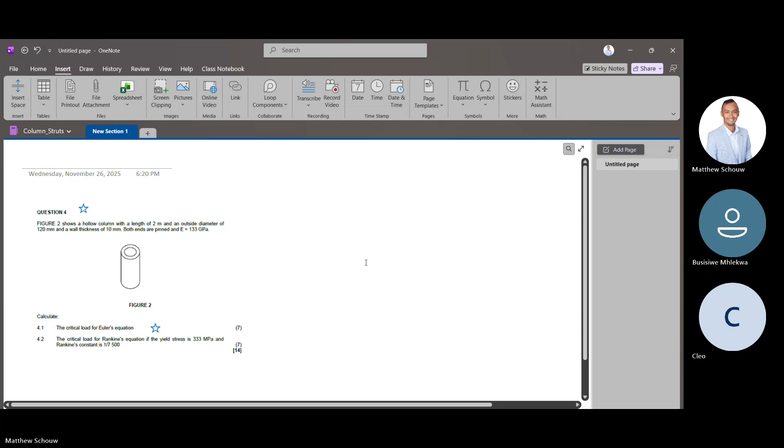Yes, sir. Perfect. Okay, so before I begin, I'm just gonna quickly go through something. I'm assuming you went over it and at least have an understanding of what buckling is about, but I'll just place this image here now. Here we go.

So here we have just some real cases where buckling has presented itself. Just talking to the image, what buckling is, or in this chapter called column and struts - it is inherent for anything which is a column, which is a strut, which is under compression. It can fail in two ways: one way it's going to be compressed fully, or it buckles.

In fact, buckling is a form of instability. So each column, if you ever design one, it is one of the considerations you absolutely must take into consideration. So even though this pillar or column hasn't broken, it is buckled. And this buckling occurs at a load less than the yield - was it before the yield? Here in this case, we have reinforced concrete, and we have the rebars buckling.

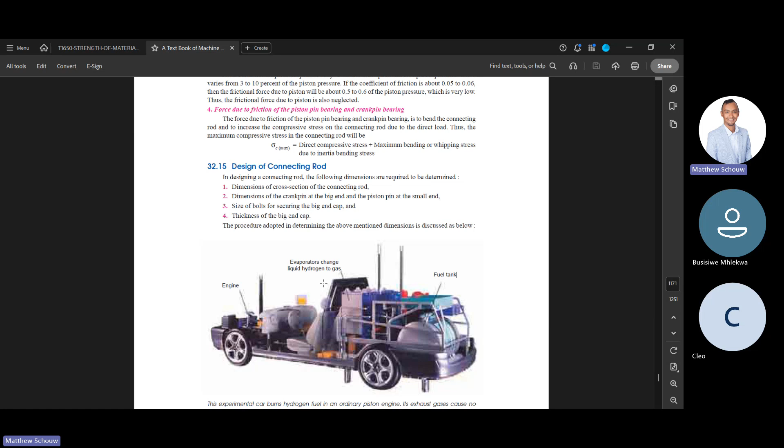So yeah, it's a very common thing that happens. Then I want to show you another thing where on a mechanical aspect this is a big deal - just going to share it with you now. So I'm designing a connecting rod, right? And if you think about a connecting rod, it is positioned in between two places - maybe one is fixed, one is moving, one is pinned. And even when you design the connecting rod, you have to take into account buckling.

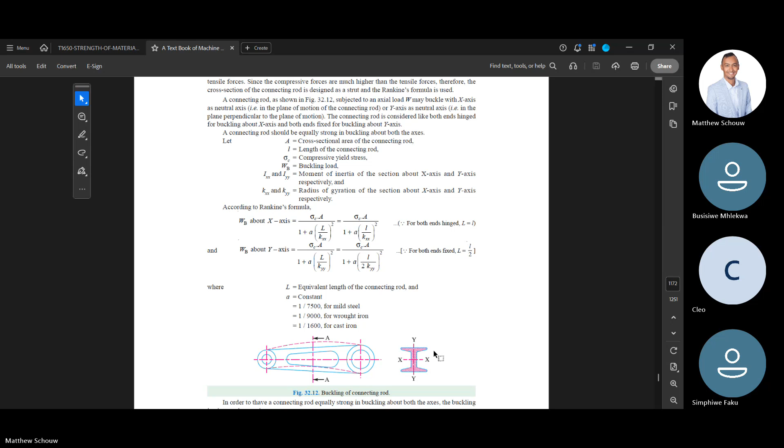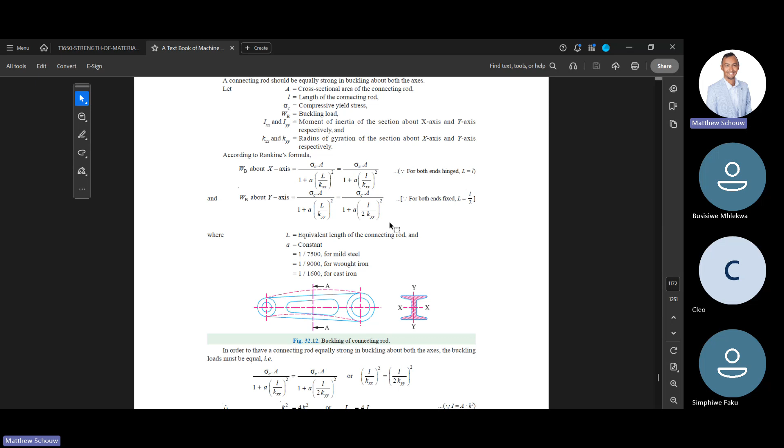And in fact, what you can see here is from a machine design book, and they're looking at the Rankine approach - I believe the slenderness ratios for connecting rods is within that limit. But anyway, even with a connecting rod you have to consider buckling as well, and when they design connecting rods it's one of the things you have to look at. Even the connecting rod itself looks similar to an I-profile - they do some mathematical manipulation, and there's some ratio between the I-section and that rod. But nevertheless, I just thought I'd mention that before we begin.

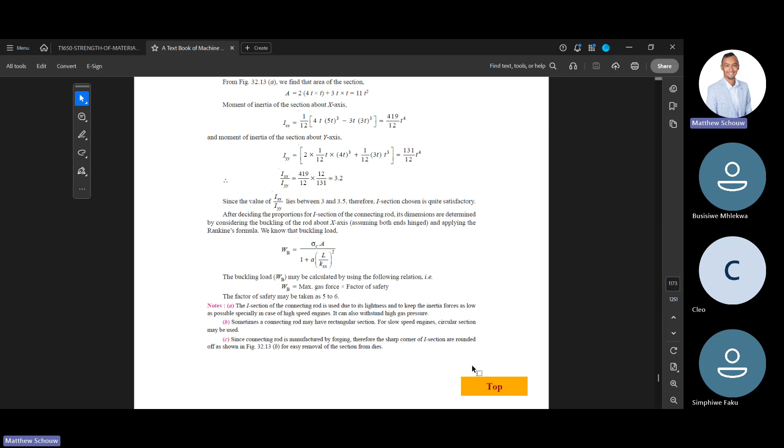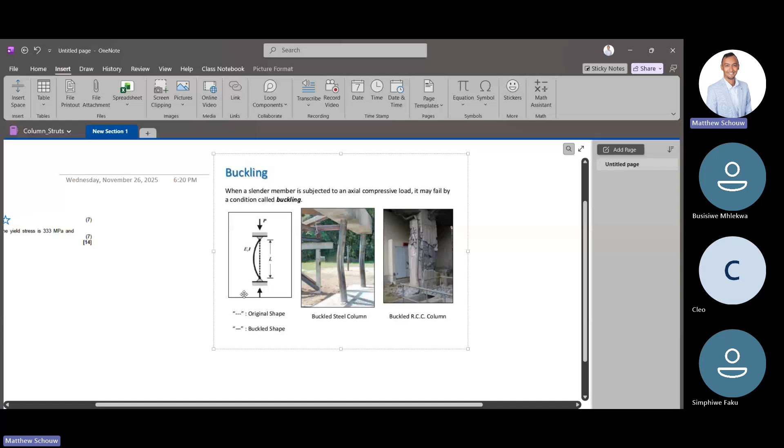Okay, so let's begin. I have two questions which I'm going to solve. This is the first one, and I'll put up the next one as we solve. Okay, here we go - so what do we have here?

We've got a shaft or column with a length of 2 meters, an outside diameter of 120 millimeters, and a wall thickness of 10 millimeters. Both ends are pinned - I'm assuming we all know that's a very important keyword. E is 133 gigapascals. What I want us to determine is the critical load for Euler and the critical load

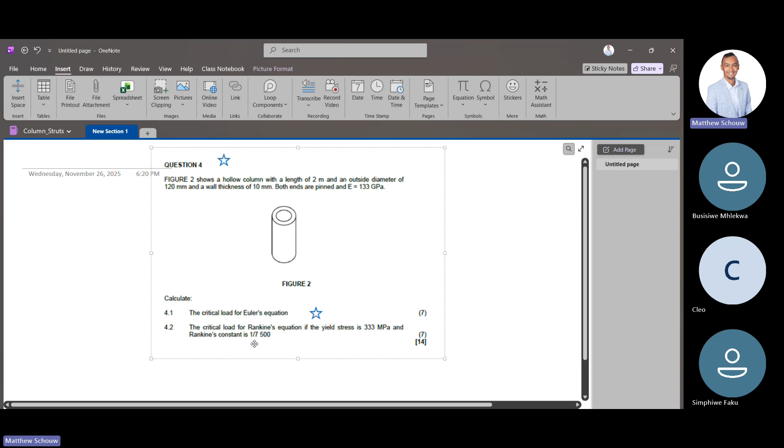for the Rankine. Okay, so these are two different approaches, basically. Normally, they will specify at this level, but yeah, I believe you all know.

Really simple. So in the formula, the unknowns currently, just in my pen here, is going to be I, because E is a material property, and then also LE, which is the equivalent length. Does anyone have an idea how we can get I and how we can get LE?

So does anyone have an idea? So I think the LE remains 2 meters because it's pinned ends.

Okay, cool. Is everyone familiar with what Cleo has mentioned now? That the equivalent length still remains 2. Simphiwe, Busisiwe, you guys agree with that statement?

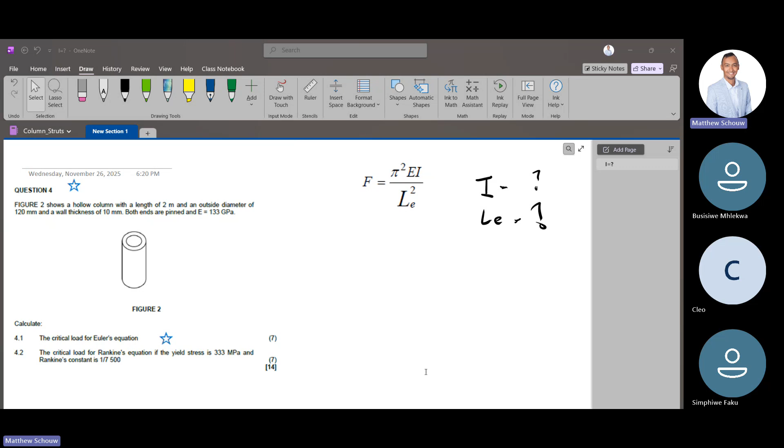So I'm just going to reshare, share the ebook now so you can exactly see. So what is important to note is that a column can obviously be fixed or configured in different ways, right?

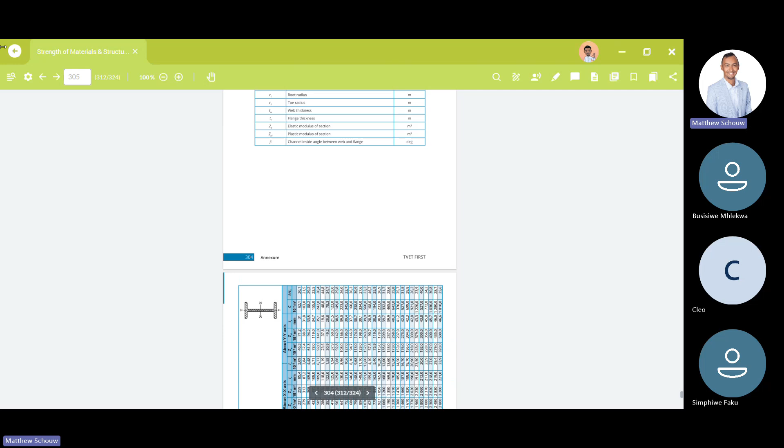So if I go to, what am I at now? Okay, cool, so if I go to the chapter, because this is in chapter 6, my bad. Over here, okay cool, let me just scroll down.

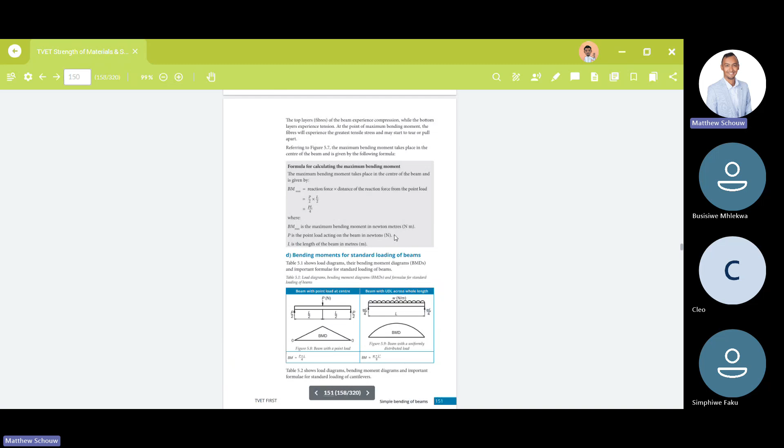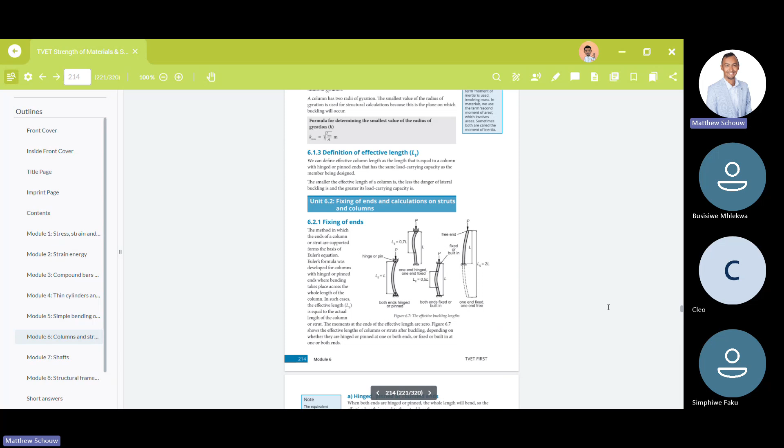So an equivalent length, right? Again, some very important concepts which they mention is - sorry, the effective length I should have used - is entirely dependent on how it's configured. In fact, what I want to say is here are the different effective lengths of the thing.

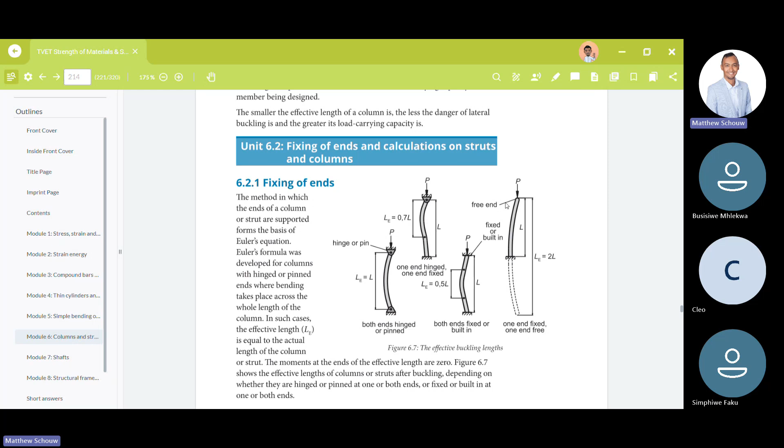So you can have both ends hinged or pinned - so they're pinned over there, right? One where one is hinged and one is fixed. In the case where they're both fixed, or the case where one end is fixed and the other one is free, right? So depending on the statement they provide you in the question, you need to now obviously get the equivalent length.

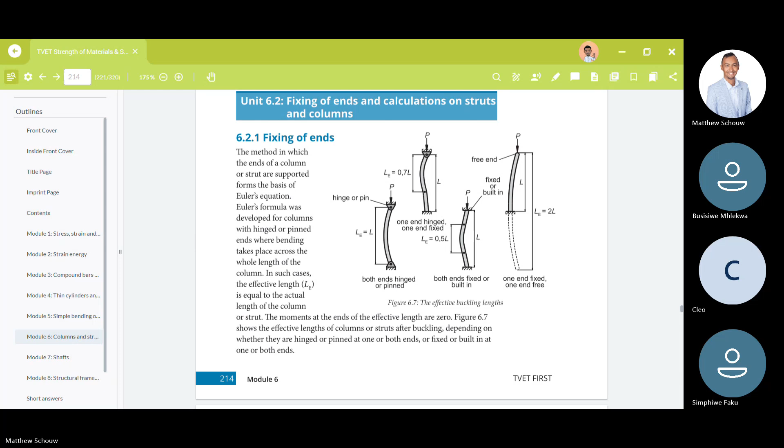Yes, sir. Okay, cool, so that's a very important concept, I guess, that you must be aware of. If you want the previous video of this one, then anyway, you can just let me know.

So therefore, our LE will be equal to L - that stays the same, which in this case is going to be 2. I believe you can see my OneNote. Now we need to calculate something called the second moment of area, which is I.

Does anyone have an idea of how to calculate I for a section like this? Anyone? It's in module 5, basically. I'll tell you what it is.

Anyone - in that one, doesn't... I get confused when it's I equals to B cubed D over 12, and when it's B - so I get confused.

Busi, I is dependent on the shape of what you're dealing with. Is that clear to you? You got that? Okay, so what I mean by that - I was finding a table for you now - is that depending on the shape you have, your I will obviously change.

So, what I is, it's called the second moment of area, and what it aims to quantify is the resistance to bending. So the bigger the I value, equals resistance to bending.

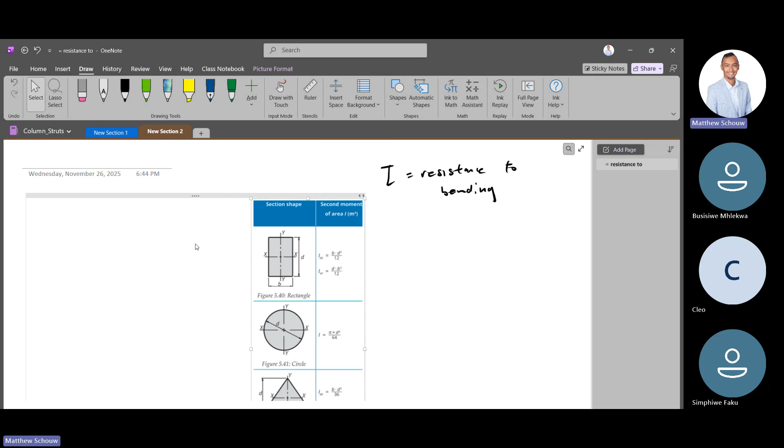But when there is thickness, I also get confused. Okay, so if we can agree that pi over 64 will be D4, however, remember there's a hole in the middle here, there's an outside and inside diameter. So therefore we have to modify it to pi over 64, big D4 minus small d4.

Now I always get concerned when students are confused, let me just use the shapes here. Is there a round one here? Okay let me see, this is round. Perfect, cool. Now use another shape over here. I'm assuming it's roughly the center over here. Let me just configure it here.

So it's quite easy to find if they give you the thickness of a pipe. In fact, even when you buy piping, I'm not sure if you guys do that, they'll say a certain inch pipe, whatever.

Thickness, let me write it like this. The thickness is equal to big D minus small d, divided by 2. Is that correct? Yes. Are you familiar with this?

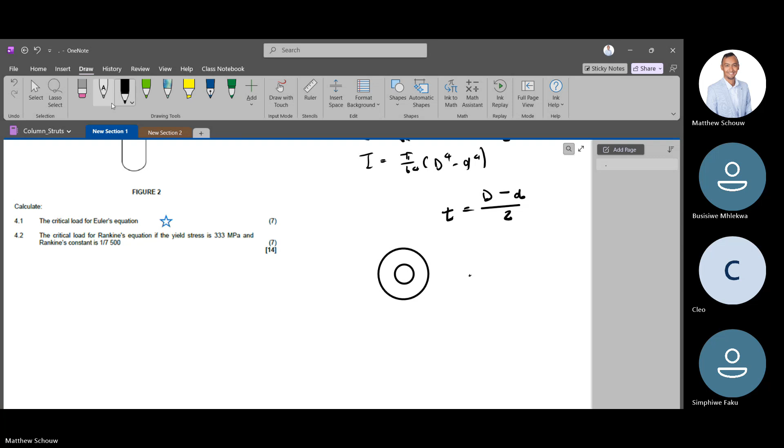So what I mean is you can think about it like this: there's big D, you guys with me? You must subtract the middle one, which is green. You understand? But then we divide it by 2 because both sides should be equal on either end. Are you familiar with this over here?

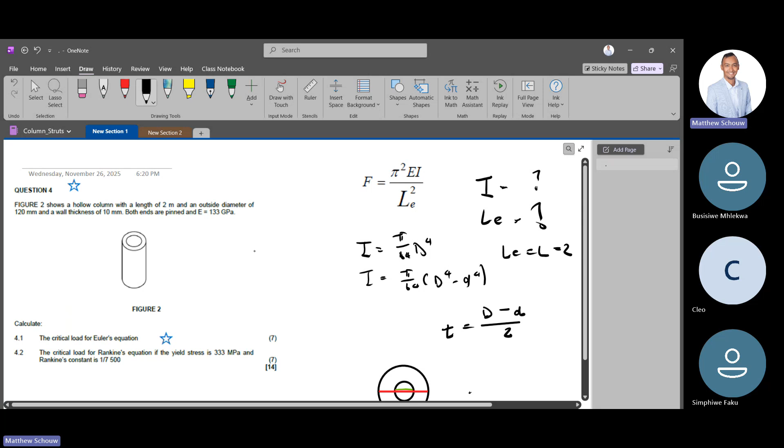Yes, sir. Yeah, so what I'm saying is that if they give you the thickness of the pipe, and they gave us the outside, you can easily find the inner. So it'll be 2T, 2 times T minus big D, minus d. And we can find, or we can say D equals big D minus 2T. You got that? So don't get confused.

So then we have big D already, and then we can find small d using that formula. Are you with me? Yes. Simphiwe, Busisiwe, you guys with me? Yes.

Okay, so all we must do now is find small d. Our big D was given as 120, is that fine? And our wall thickness was given as 10. So we just say 120 minus 2 times 10, therefore D will equal 120 minus 20, which should be 100 millimeters. You guys agree with me? It's really easy.

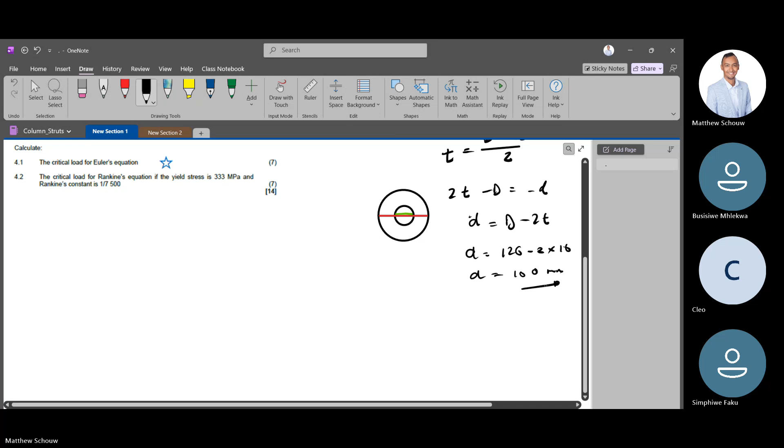Is there any questions up until this point? No, still fine, sir. Okay, but you've understood what I mean. So if they give you a round section, like a column, and they give you thickness, then obviously you want to find the diameter. It's kind of hinting—sometimes they might give you the smaller diameter and you need to find the bigger diameter. But what is important to note is that when you find the second moment of area, you need to use this formula: pi over 64, D4 minus d4.

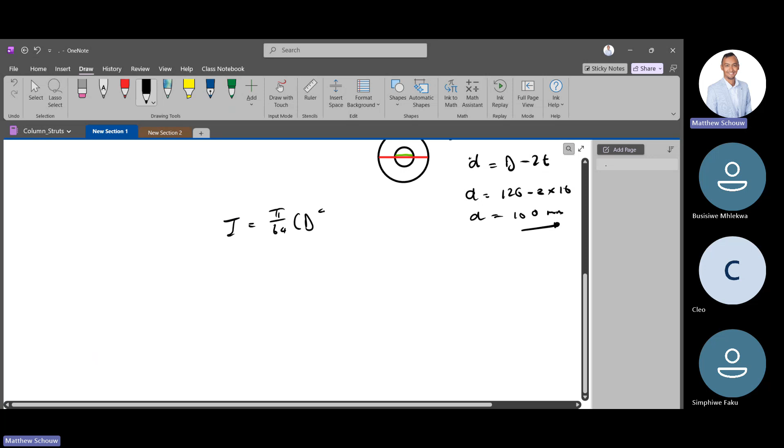Okay, so what I want you guys to do for me quickly is calculate I for me. I is pi over 64, big D to the power 4 minus small d to the power 4. That's pi over 64 times 0.12 to the power 4 minus 0.1 to the power 4. Can we get this value?

5.27 times 10 to the negative 6. Does everyone agree with that? Can we trust Cleo?

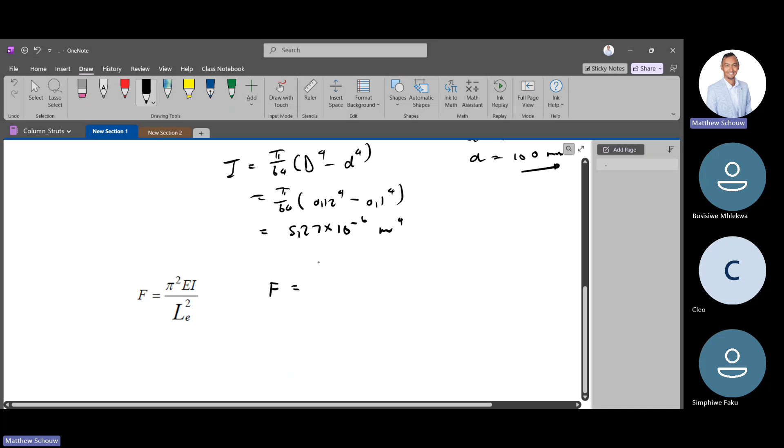Yes, it's correct, sir. Perfect, amazing. So what we then just do now is take that formula, and now we're going to calculate this critical load, the load where we assume it will buckle. So we say F is for Euler, it's pi squared times E, which I believe was 133, times that over there, 5.27 times 10 to the power negative 6, and then we're dividing by 2 squared.

I just want to say a comment here. The reason we're lucky is because normally with buckling, or struts, we normally have to look at the I with the least second moment of area. But in this case, because it's a circle, IYY and IXX are exactly the same. So IXX and IYY for a cylindrical section is the same. So can we get that buckling load quickly?

So what do you do in a case where you're not sure whether it's the same, if you don't get a symmetrical drawing? Do you calculate both a Euler and a Rankine? With a Rankine it's like a built-up section or something like that. Like if you get a channel, or an I-beam.

That's the point. So I'm doing a very basic one first, then I'm gonna do one, I think it's 2024's paper if I'm right, where we have two channels next to each other, and then we've got to find the second moment of area using the steel tables and things like that.

For symmetrical sections, Ixx is equal to Iyy. Not symmetrical, just for the cylinder, you know what I mean? In this case, are you with me? So yeah, they don't tell you, can you see they just give you one I over here? Yeah, because both Ix and Iy were exactly the same.

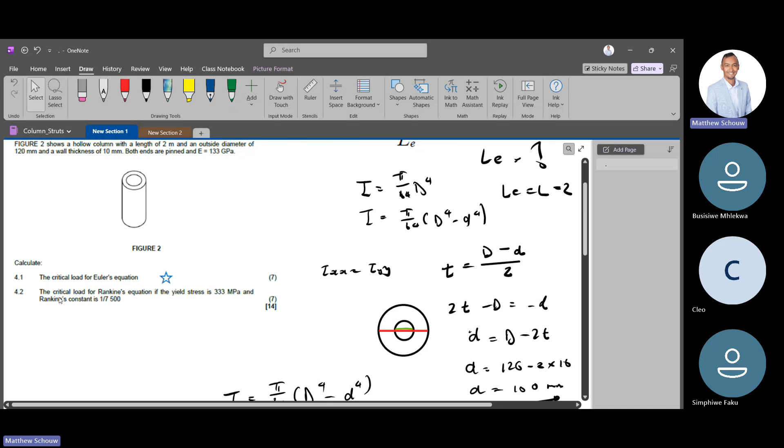Can you see it over there? 1 over 7,500, can you see that? Sometimes you might have to calculate it, but normally it's typically given. Can you see it over there, the Rankine constant? Okay, can you guys see it over there? So it's 1 over 7,500, you see there?

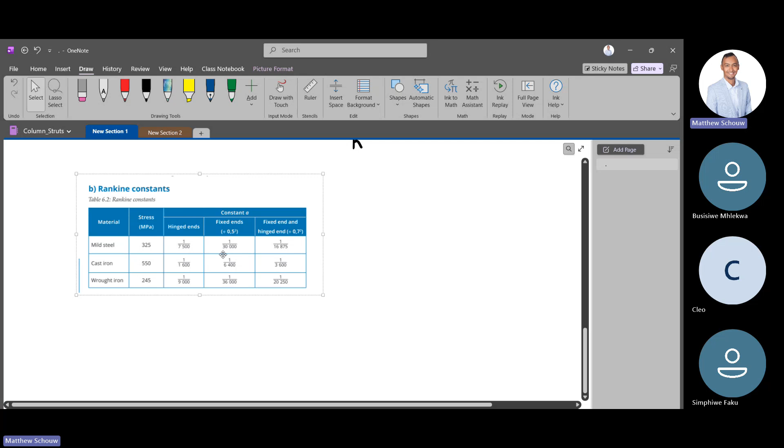So depending if it's hinged or fixed, that will give you this value - unless they provide the table, which I doubt. But I mean, you don't have to memorize these things. No one memorizes these things, right? And it comes from a certain place.

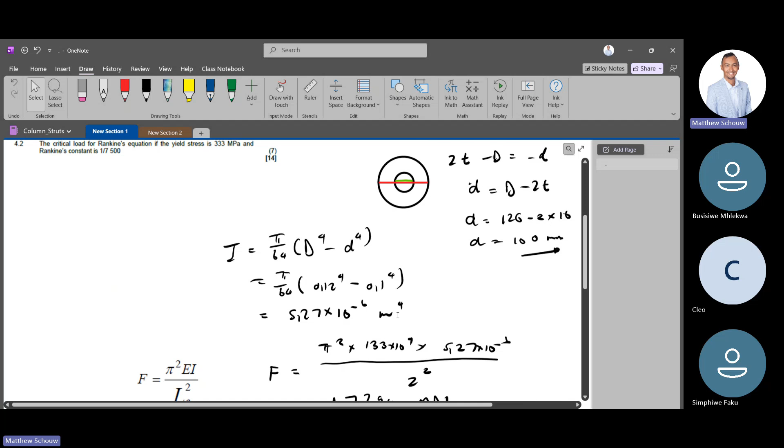Again, what's next is our equivalent length. As I mentioned before, depending on how it's configured, we will determine that. So that's going to be 2 meters - it's exactly the same as the previous. So LE equals L, should I write it like that rather? No? That's fine. Now you're going to find K.

So if you've done your previous chapter, you have learned about something called the radius of gyration, right? And that formula looks like this. You guys know that formula? Are you guys familiar with that formula? Yes sir. Okay, anyone else?

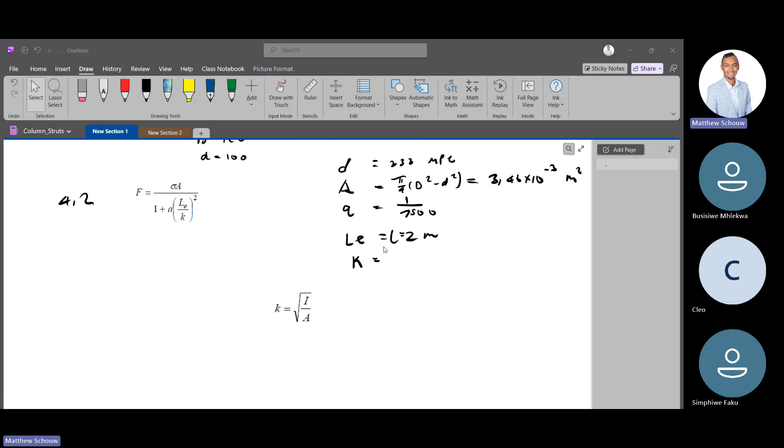Yes sir, okay great. So the only difference with the Rankine, again remember, like I mentioned, the key thing here is to know that you must use your least second moment of area. In this case, we are fortunate that we don't have to compute the least one, right? So it's basically the same thing over here.

So all we must do now is find K, and to find K we need root of I over A. And in that case, we computed I, right? I was 5.27... it's on my tablet, okay, 5.27 times 10 to negative 6.

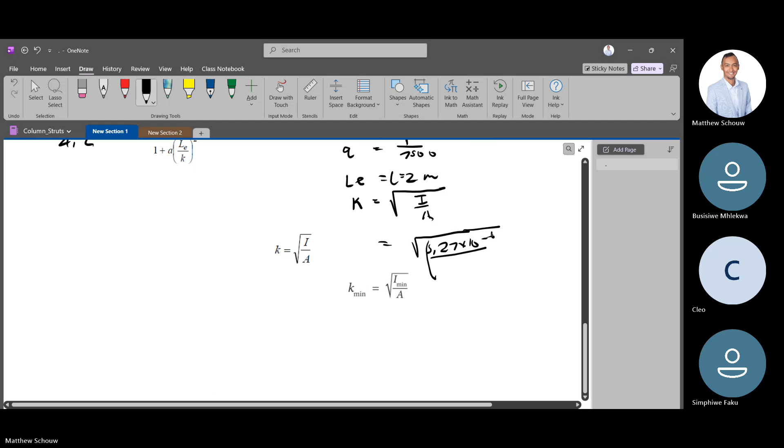And then we're going to divide all of that by the area which Mr. Falco has calculated, which is 3.46 times 10 to negative 3. That's good, okay, are we happy with that? Let's get that. Okay, and by the way, the unit of this is millimeters - it should be... just never mind.

Okay cool, so let's quickly get K's answer. Millimeters or meters? I mean, yeah.

For the stress, this formula - do we use the yield stress, or because I don't see it's given the factor of safety? So you have to use the yield, but if they give you a factor of safety, obviously you must divide. But you'll normally notice those numbers - like if they give you that the stress is like 600, 900, then you must obviously divide. Unless they specify factor of safety, then you probably won't divide at all. Okay, yeah, so it's typically clear.

Let me just check the one we're going to do now while you guys are calculating it. I think it has a factor of safety, let me just check. Yeah, it's last December 2024, I'll show it to you. Does it have factor of safety? No it doesn't, but yeah, does its job.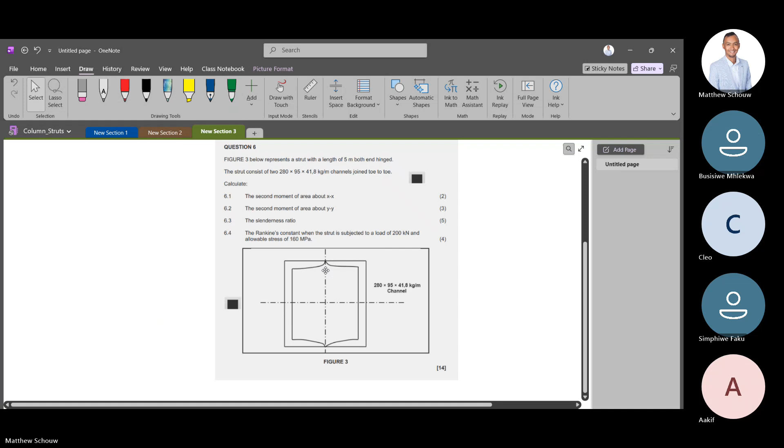Okay, all right. This is December 2024, last year's paper. Okay. So this one, what's nice about it, what they typically do with these type of questions, there's two ways they'll ask these questions.

This is the standard over here, where they'll ask you the second moment of area. And then from this part here, they'll either ask you buckling — I call it buckling, the column and struts, module 6 — or they can ask you a bending type question. I'm sure you've picked that up if you've engaged with the video and practiced, right?

So in this case, it's a buckling question, obviously, right? Because that's what's important. I believe, Cleo, you asked something like this, where you have two different sections now, right? It was not symmetrical, or they give you a steel section. Yeah. So this is kind of symmetrical still, but anyway, two different steel sections.

Anyway, so here we have a strut, right? Its length is 5 meters, and there's two sections, 280 by 95 by 41.8 kilogram per meter channels, right? I'm not sure if they actually both struts like this, but anyway, okay, cool.

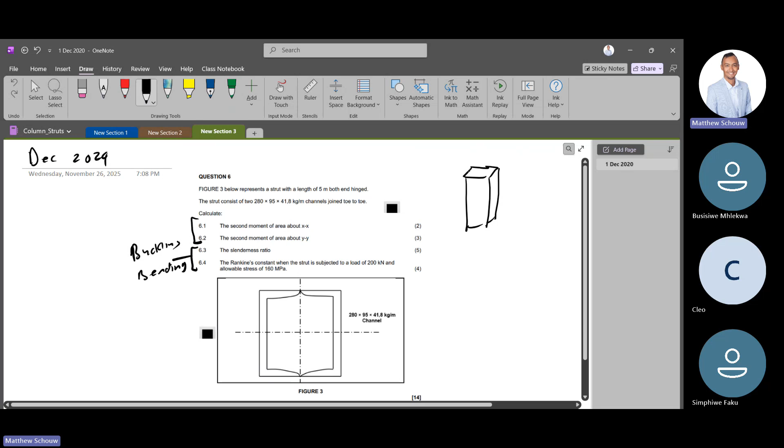If you could imagine this, imagine something like that, like one channel like that. You know what I mean? And okay, obviously my sketch is a bit sus, but okay, it's fine. And my other channel's like that. Can you see it there? Right?

We're not sure what it's supporting. There could obviously be something on top of this. We don't know, there could even be four of these things.

The question here is to determine the second moment of area, the slenderness ratio which we talked about, and also the Rankine constant.

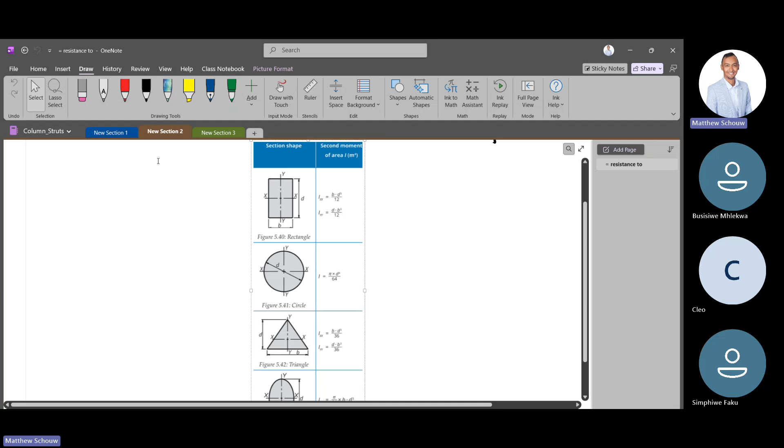So again, they're basically telling you that you're going to want to use this equation or model over here. Let me just copy this thing over here.

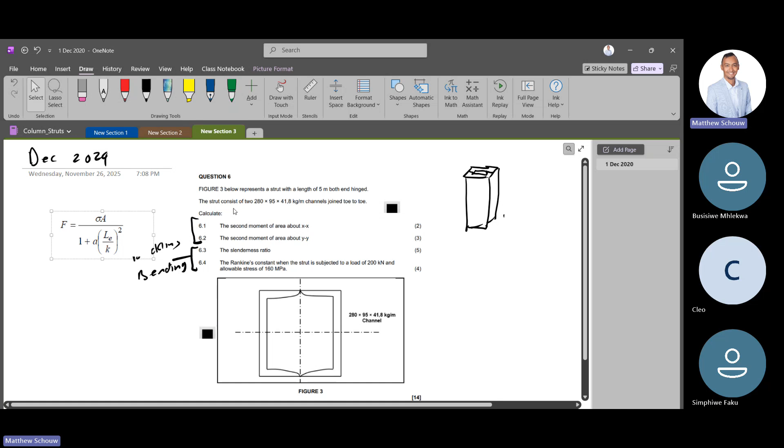Let's quickly see what we have. We have the stress given, we've got the load. In this case they give us a buckling load, but now we need to calculate I. Both hinged again, both hinged - okay, that obviously tells us our effective length. And then we have K, which we must calculate.

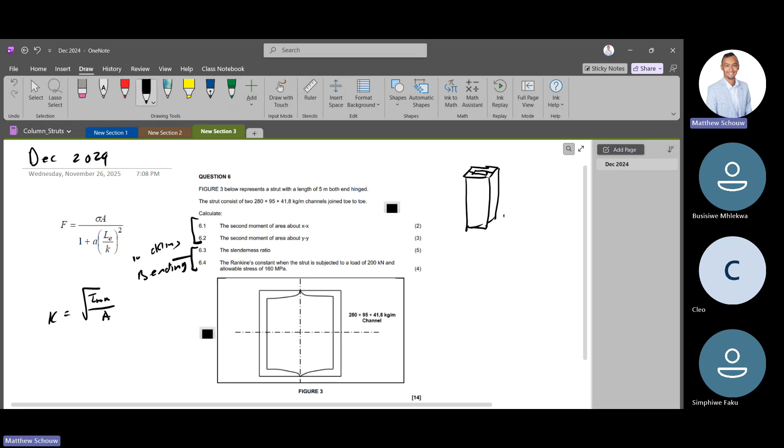But anyway, now we need to calculate I, right? Because you know that K, the radius of gyration, is equal to the square root of I minimum divided by area. So how do we get these things now?

Okay, so colleagues, are you familiar with the steel tables? Busi, Aakif, have you guys touched the steel tables yet? Yes or no, sir? Aakif, have you touched it, Mr. Faku? Video? Yes, sir. Okay, cool.

So obviously with this it will be provided, and what you have to do here is go look at the steel table and get these properties. So what I'll do now is find that and paste it there for us so we can take the respective property from it, if I can find it here.

Here we go, it's a channel, right? Okay, what is it again, let me just check here - 280 by whatever. Why am I not seeing it here? I'm just checking for the channel, guys, just give me a second. I'm just going to rotate this quickly. 280 by what is it, 95, right?

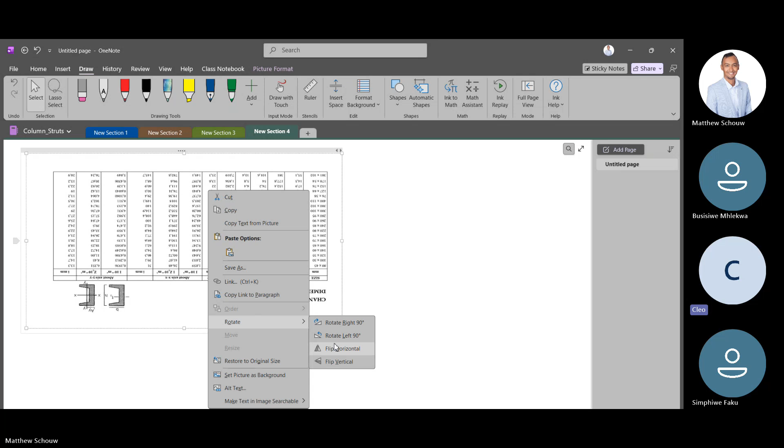Yeah, rotate - there you go. You were asking if we could use, if we should look at the I value of the XX axis. Yeah, I'm gonna get to that now, sorry, just give me a second, I'm just trying to rotate. Okay, yeah, there we go, okay cool, so that's our table.

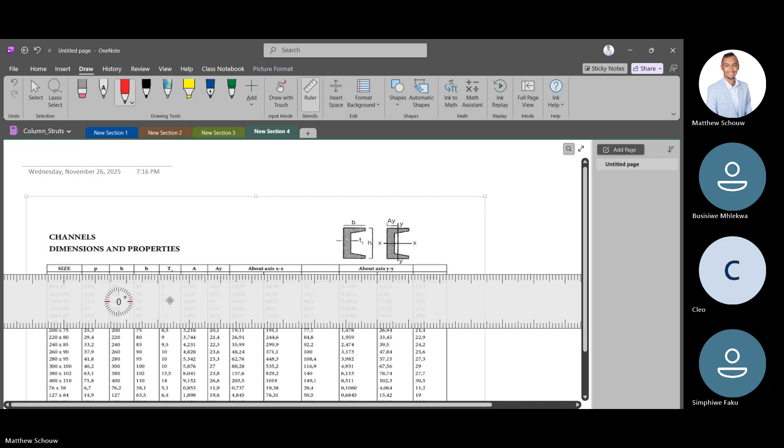And in the question, the steel section we're using is obviously this guy over here, let me just draw a line. We can all see it, cool, that's that one there, right? So let me just highlight everything so we can see. Okay, that one there - we're all content with this, eh?

So now reverting to this here, we have to look at the way it's obviously configured. I think that's what Cleo's asking, can you see it's based like this? So we're going to have to do IYY and IXX and check which one is the least. That's what we're going to do.

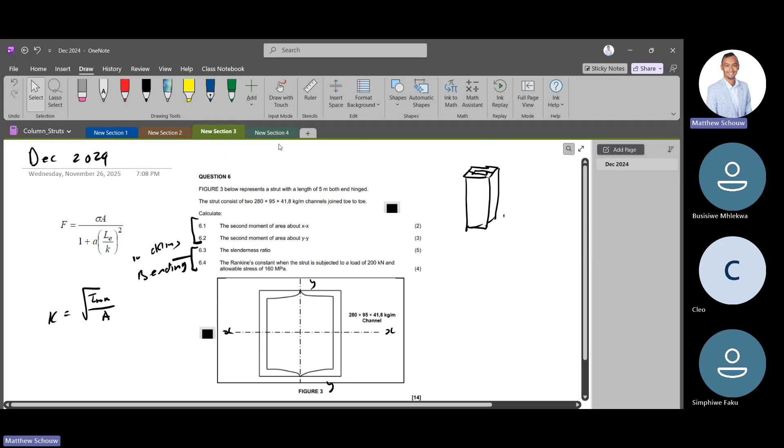But anyway, the first point is 6.1, and they want it in the x-axis. Can we all agree this is the x-axis? That's the y. So all we have to basically do now is go right through here, exactly in the middle. So all we have to do is look at what our IXX is. In this case, it's going to be that one there, right? 62.76.

So colleagues, are we happy with that? Can we all see that there? Am I seeing the right thing? Yes. Anyone else? 62.76, right? Are we content with that?

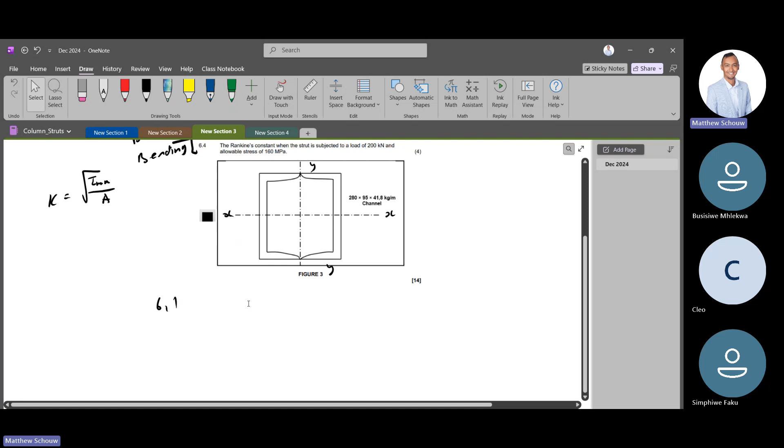Yes, sir. Okay, but obviously, because we have two sections, we must times it by 2, right? That's fine. So it's 62 point... was it 7 something? 7.6, right? And the total IXX will just simply be 2 times that value.

Normally for buckling, they never make the IYY and IXX too difficult, but again it's possible that they can mess you around, they can challenge you a bit more. So we're happy with this, timesing by 2, but it's 2 sections and it's going exactly through that.

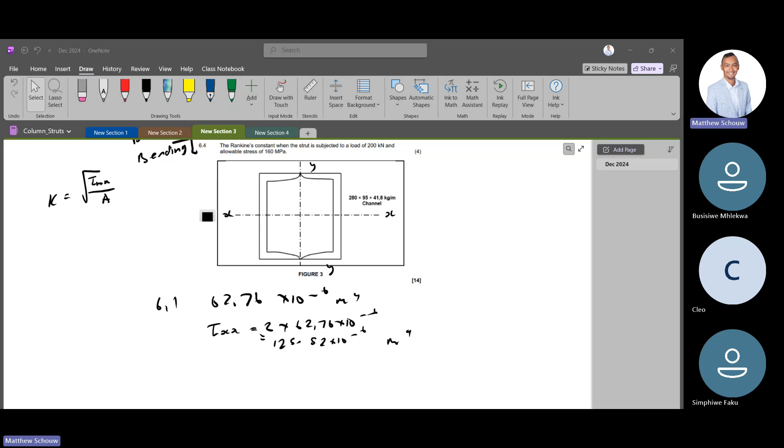Okay, yes sir, well can we move on? Can we do IYY now? Yes sir, okay cool. So IYY, remember this now here is our center, right? So let me just be really obvious here.

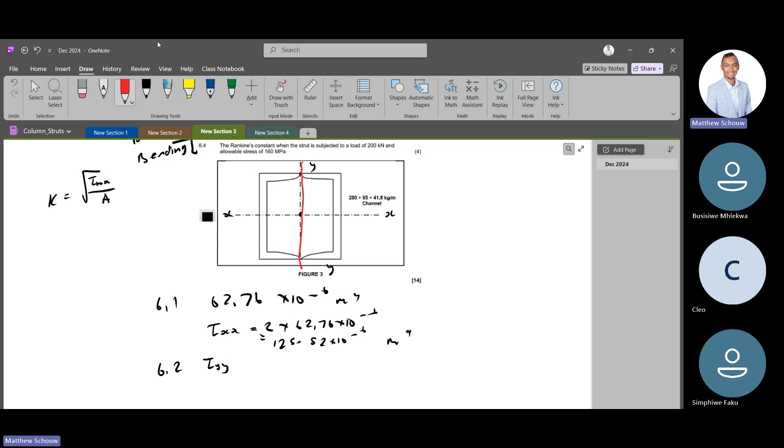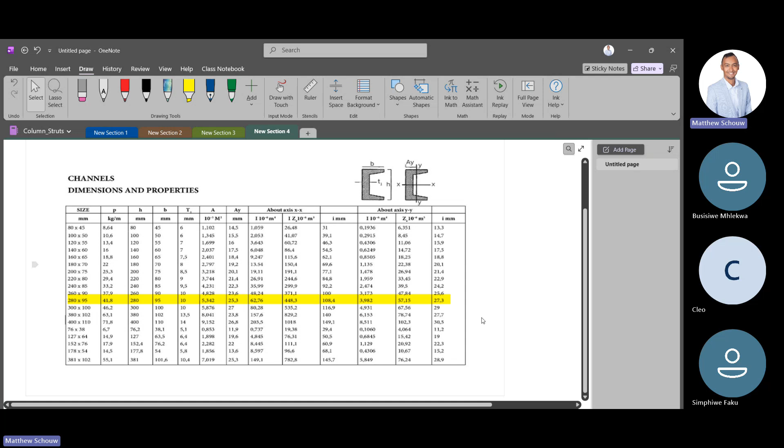So now to find IYY, we can't just simply take IYY from this, because IYY here, right, we can actually see IYY. How can I go in now? Or zoom in, zoom out. Okay, anyway.

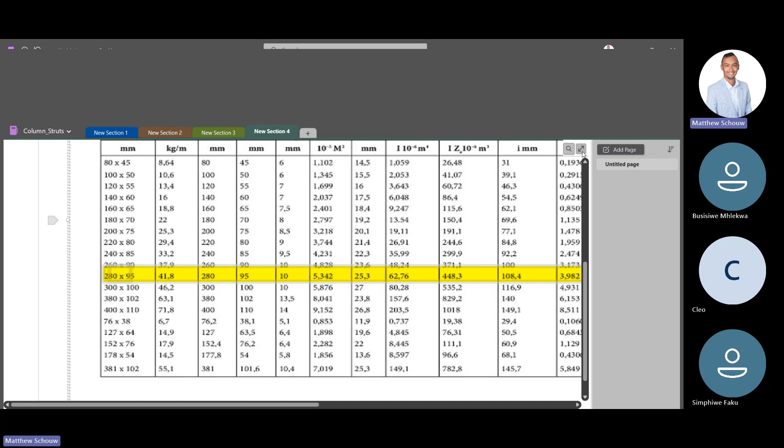IYY is over there, right? Can you see there? It's not at the end, it's a distance away. Can you guys see that? The center of the channel is somewhere there. I hope everyone can see that.

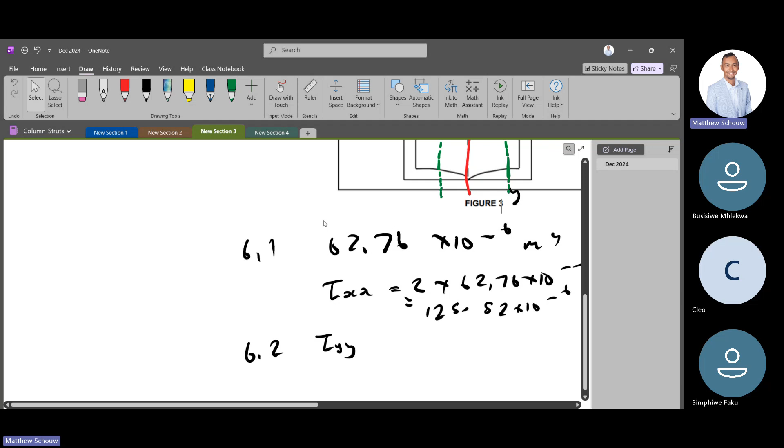So what I'm saying is, if we revert back to our sketch over here, IYY is somewhere here, like that, you see? So now the parallel axis theorem, obviously it's also on the other side as well. What we're going to have to do now, if you remember, you saw a formula like this: I equals IXX plus A times some distance squared.

Have you seen this before? Something like that? Yes, sir. So this is used when the section is away from the center over here. So all you have to do now is find the distance from here to there. You understand?

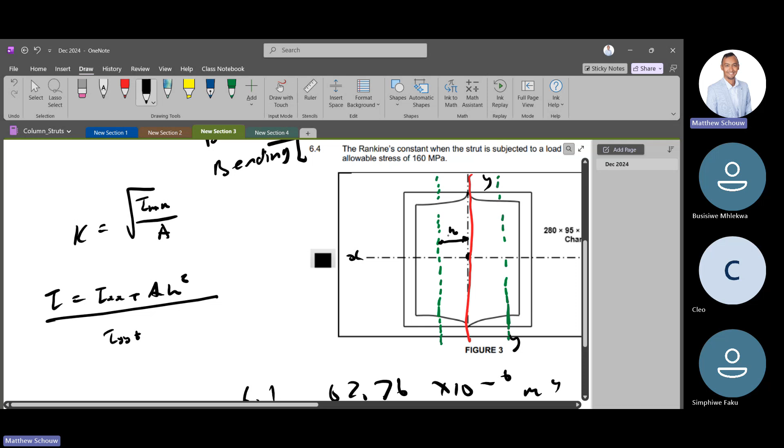So what we're going to do, we'll take IYY as is, and then we have to say plus the area of the section times that distance. This would be called h, right? There's different ways to call this, people call it different things, but I hope you get the idea. So now we need to find what is the distance from there to here.

Just make this big again. From here to there, right? Do you have any idea how you can find it? It's fairly easy, I think. Be careful in saying that.

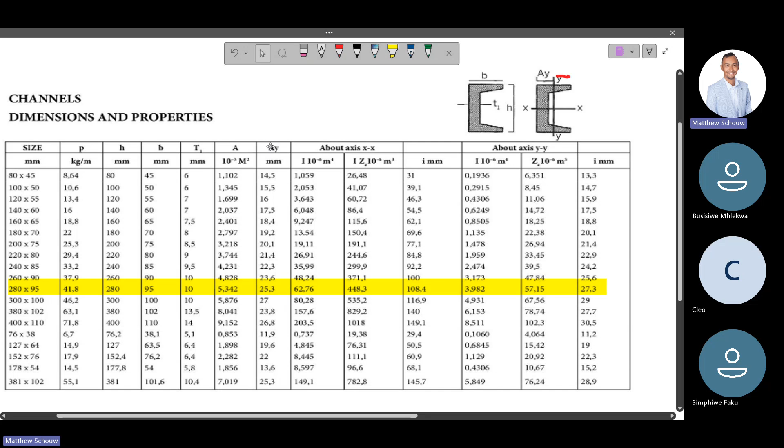Will it be divided by 2, sir? No, because they give you AY. Do you know what this AY is for? That value here? It's a good guess. What's AY for? AY tells you the center of this particular shape over here, you see there?

So then, okay, yeah, so it's going to actually be... so you're kind of right, it's actually going to be B minus AY. Is that clear? So let me just sketch our own one here. No, let me just be a bit dramatic now.

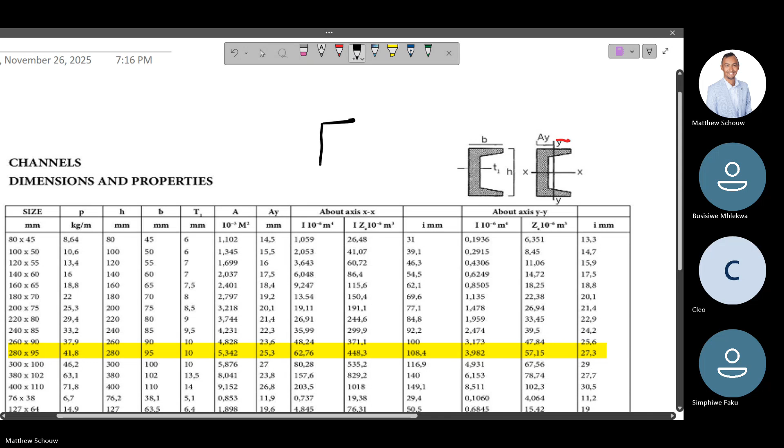So B is this distance here, right? From here to here. And okay, obviously AY is somewhere there, right? Are you with me, colleagues? Got that? No, AY is... that's not AY, it's here, from here to here somewhere.

You see? So we need to find that distance from here to there, right? It's going to be fairly simple. We can say our H is going to be equal to, what is B in this case? 95, right, 95, and that's B, as you can see there. 95 minus this over here, so 95 minus 25.30.

And the reason why we're doing this is because it's not in the center of our assembly, so now we have to use a parallel axis theorem. Is that clear to everyone? I hope so. If not, please tell me.

Okay, so what's bothering you?

I don't know, I'm used to just working out B divided by 2. Because it's like, then that's obviously the centroid of the channel.

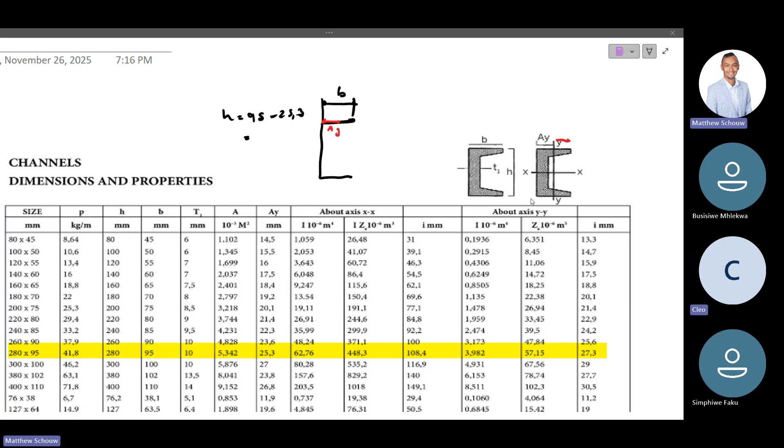It's not, that's the thing. It's not exactly. The center is not B divided by 2. It's not an I-beam, it's a channel. You know what I'm trying to say? It's a different type.

Because it seems so simple, but if you orientate the channel like this, where's the center? Is the center here somewhere? You know what I'm saying to you? It's not actually B divided by 2. You can only do that if it's a perfect shape, you know what I mean?

Your logic is right if you have a perfect triangle. You see what I'm saying? I mean, triangle, rectangle. But imagine you have a perfect rectangle, but then what happens if you remove some material in the middle?

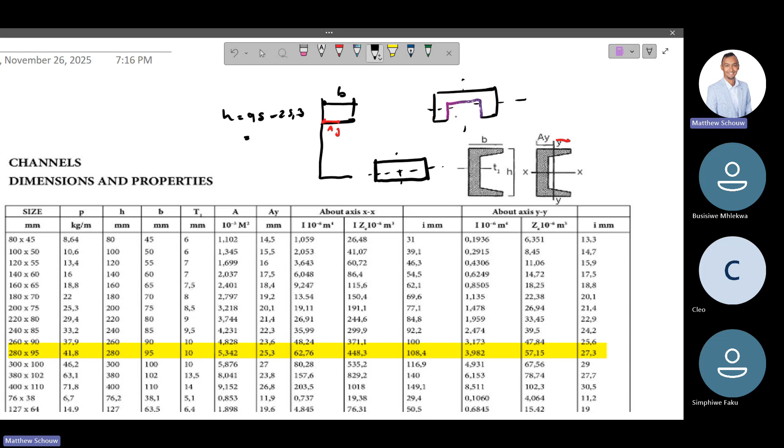You can't tell me that the center of gravity is exactly the same, but it has to change somewhere, because this piece is missing now. So it has to be positioned somewhere. You get the idea. So with a channel, always be careful of the AY - that tells you where the center is. Okay, anyone else? That's what's given there as well.

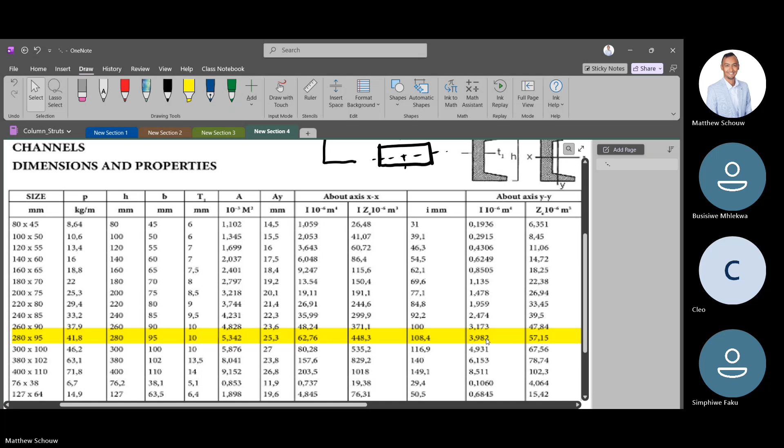So IYY, we must still check our section. In that case, IYY was 3.982 - can you see it there? Am I right? Yeah, so that there, can you guys see it? That's I. Yes sir, you put in there 3.982

times 10 to the power negative 6, plus the area. The area is given as 5.342 negative 3.342, okay, 5.342 negative 3, and that R, sorry, my bad.

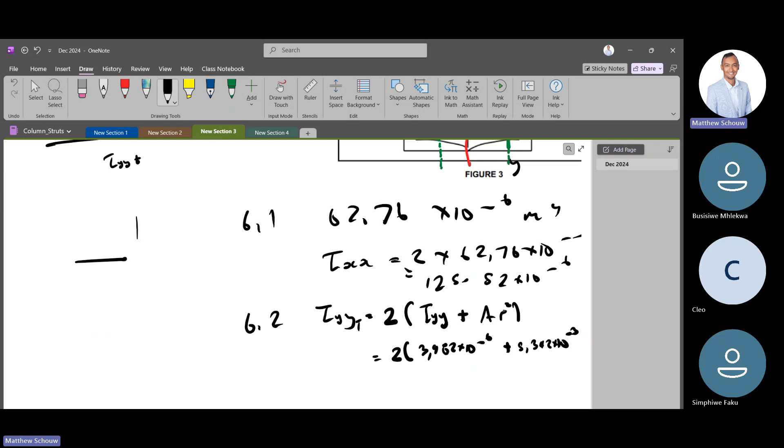I made a mistake here. That R is not outside, R is here - I mean the square is here. And then obviously we found it to be 69.7, all right. So you just say that times 0.0697, and we squared it, close the bracket, times by 2. So can we get that IYY?

And again, we're going to have to compare which is more, IXX or IYY. That's going to be important in the next part. I'll keep left.

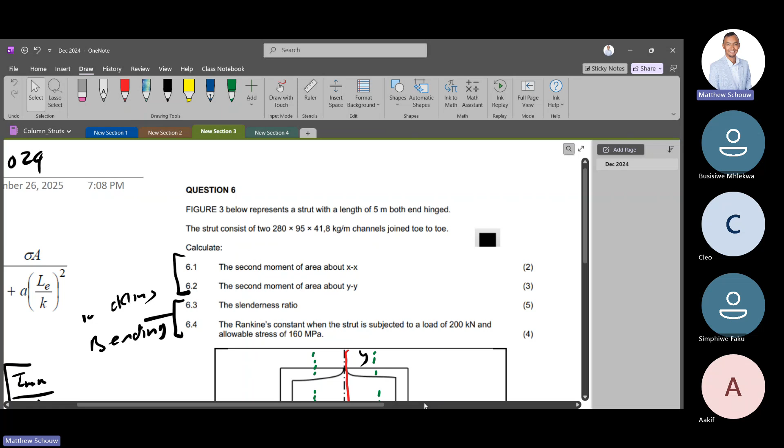Right, so that's definitely correct. Now, very important here, between these two values, it means that this column is most likely to buckle on the y axis. Meaning, where's my y? My y is like this in this case. So it's gonna buckle on y, you know what I mean? Not on the x.

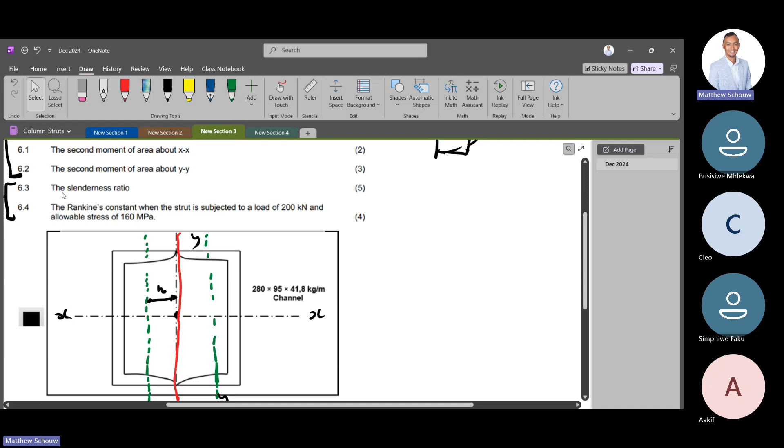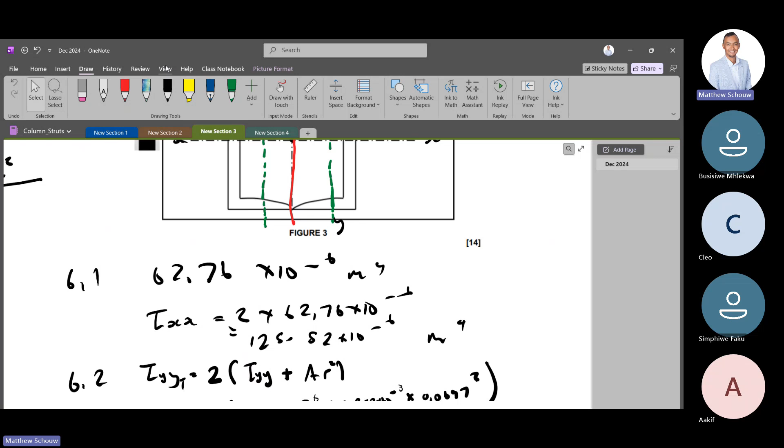So we've got that. Now they want something called the slenderness ratio. Slenderness ratio, SR, is LE over K, exactly the same as... let me just zoom out again, zoom out to zoom in. Yeah, that's exactly the same from that formula over there. So you notice in the Rankine-Gordon formula, the slenderness ratio is over there, so we needed to calculate this anyway.

So all we must basically do now is find this. SR is equal to LE over K. And remember in the previous question, K was I min divided by the area. But what I should have mentioned, our area as well, we must be careful. I think our area we must times by 2. Am I right? Or do we find the total area? Yeah, am I right? I think so. Anyway, I hope so.

Okay, so obviously our L is easy. The question said both ends are hinged, right? So it's exactly like the previous question. Let me just be deliberate again and show you the table so you can actually see it. Okay. Cool, I'll just use this.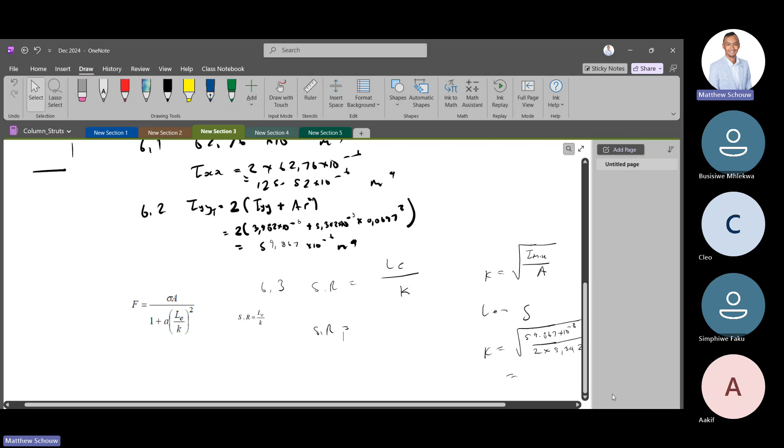And once you've done that, I want you to calculate the slenderness ratio for me. I'll give you guys 2 minutes to do that quickly. So I got 66.794.

All right, colleagues, did we get it? Cleo, Busi, Simphiwe, Aakif. What did we get? 66.794. Is it correct? I hope that's correct. I got a different answer. What is your answer? I got 74.85 times 10 to... 74.8.

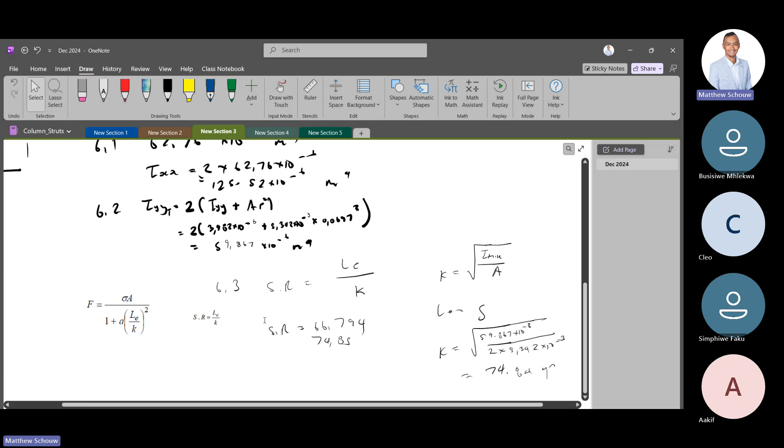Okay, so if that's done, I'll leave it here, and you obviously can check the past paper for 6.4, but 6.4 is fairly easy. I'd like you guys to do it, and all we basically do is take all our individual parts over here, and we're just gonna have to solve for that A. So F was given here as 200 kilonewtons, the allowable stress is 160. Maybe you should just do it.

That's 160 megapascals. Our area, which I believe we must still use the whole area. I'm still feeling quite funny about the area, because do we use 2 times 2? Do we use, you know what I'm saying? We have to consider the whole area because it's the whole column itself. So that's still bothering me now.

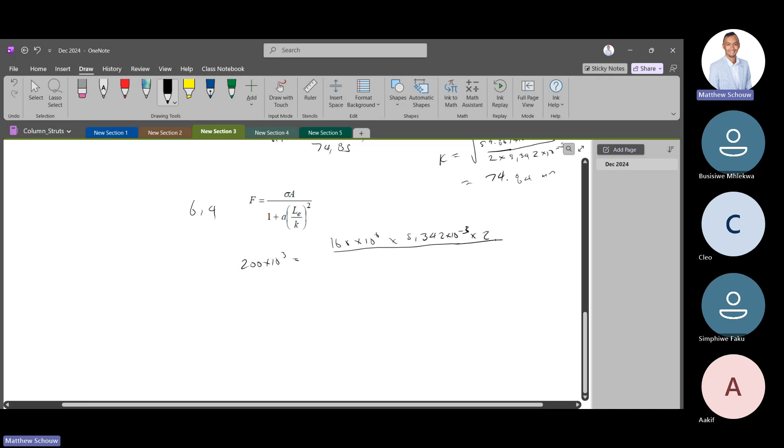And then obviously 1 plus A, which we're looking for. And then we have Le over K, which is the slenderness ratio. In this case, I think we've got 66.794 squared. And the only unknown is basically A.

All right, is there any questions, colleagues, before we conclude? That area is still bothering me, but anyway, yeah. I'm pretty sure I'm right. So yeah, are there any questions?

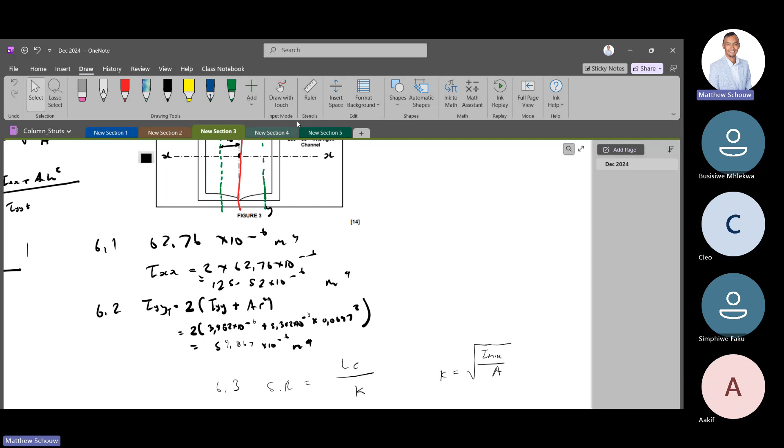Are we given A? Yes, we are given A. We took A here, it's coming from the table. Where is it now? There's A. Yeah, you see there, 5.342. Okay, the one for area. That's for area, that's A. A is area, there you go.

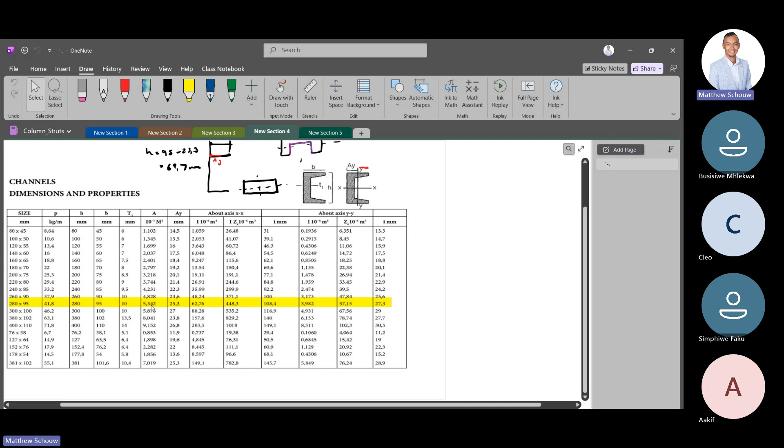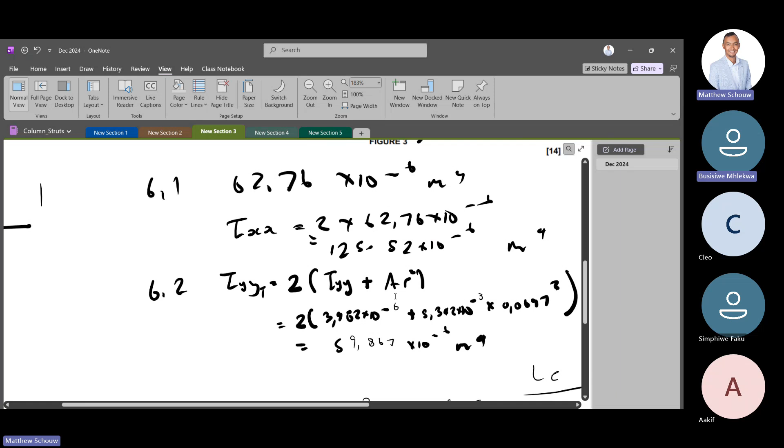Can you see that, Busi? Yes, can I see it? Yeah, there it is, 5.342. See that? I use that same thing. You use the same thing? Yes. You use the same A here as well. Can you see the same A? Can you see that? Yes, sir, and then the same A again.

This one on top, that's the A. Oh, you're talking about this small A, the small one we're working out. Yes, we are finding that A. How do you work out that A, sir? Because I got confused in the other question paper I was doing.

Okay, but I mean it's just simple maths here, right? We're just timesing 200 over here. Cross multiply if you want: 1 plus A times 66.794 squared. Right? Are you with me? Can you see what I'm doing here? That's multiplied there, we have 160 times 10 to the power 6. Just want to confirm it is 160, that's your yield, and then times the total area. I'm pretty sure that's the case.

Obviously you want to solve for this, then this is going to be quite simple. It's going to be 1 plus A, 66.794 squared. That's 160 times 10 to the power 6 times 2 times 5.342 times 10 to the power -3. And we divide this by 200. What about that?

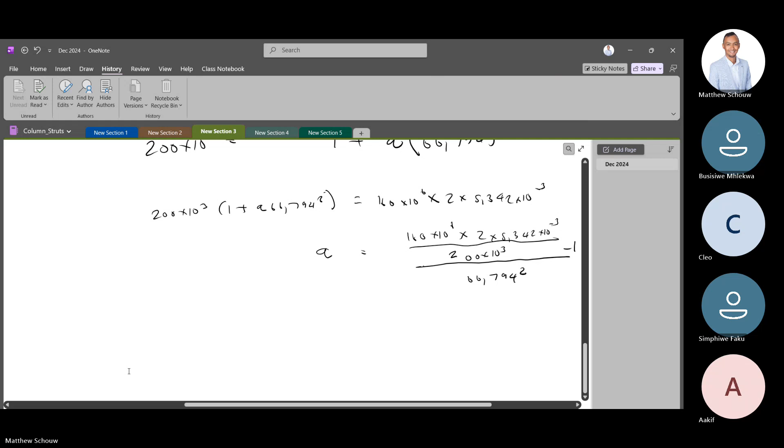And when do we use this one with A over 4? A over 4, what is that? Yes, it's here on the formula sheet. Let me have a look. F equals sigma times area over 1 plus A over 4, brackets LE over K squared.

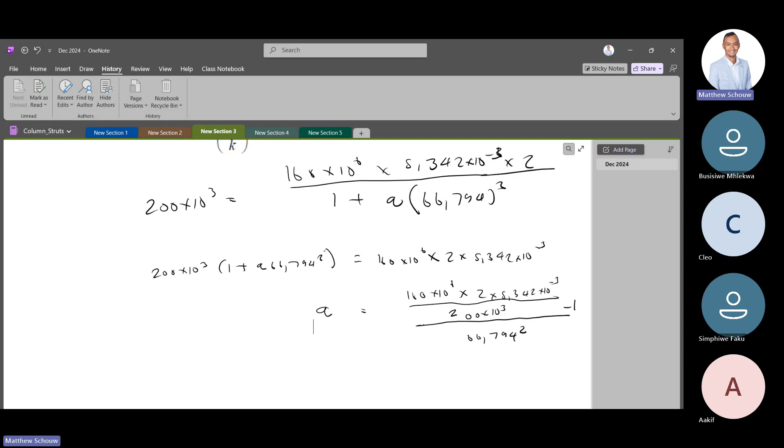Oh I see, yeah, so let me just open it up. So I think what I'll do, I'll show it to you now. You're referring to these ones, no? I'll take it now, so that's A. So don't get confused, just use the ones that I've shown you, right? So the only difference between the two, if you look at it, right? Can you see here's LE, this one here, and this one here. Can you see the difference here?

Let's look at these two here. Yes. Yeah, one has effective length, the other one doesn't have effective length. You see there? One has effective length, the other one doesn't. You see? And if I were to unpack that, obviously you want to use the one with effective length. You know what I'm saying? That's just, I don't know why they gave you the other one. I really have no idea why. I'm just trying to see if I can find something to assist you. Yeah, there's no other reason why. Just use... there is a straight line formula as well, which is another approach for buckling.

Yeah, you just focus on the one with the effective length. That's it, don't worry about the rest, it does the same job. Are you with me? Just understand the effective length. Maybe anyone else has a comment on that one?

It probably possibly does have a unit. I'm gonna just quickly check the thing now. And when you find A, if you use a calculator, you can actually put it as a fraction for you. I don't know if you know what I mean. Then you will set 1 over something, so you don't have to make it 1 over something, because 1 over a particular value is, you know what I mean? So you get a decimal place, and then you just click the S to D function on your calculator, and it will make it into a fraction.

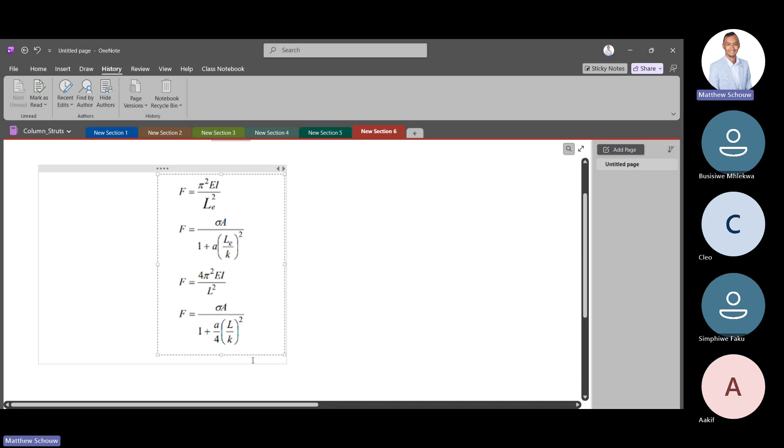So what I suggest, don't worry about these ones. It's of no benefit at this point. I don't want to unpack exactly what's going on here. It's critical time now. Is there any other questions?

None. Okay, guys. Yeah, and again, the way I recommend when you approach the exam, just make sure you know what you know, man. You know what I mean? If you don't know something, don't prioritize it. Because I believe your pass mark is only 40, and obviously you guys want like a 50%. But let me just quickly show you something here.

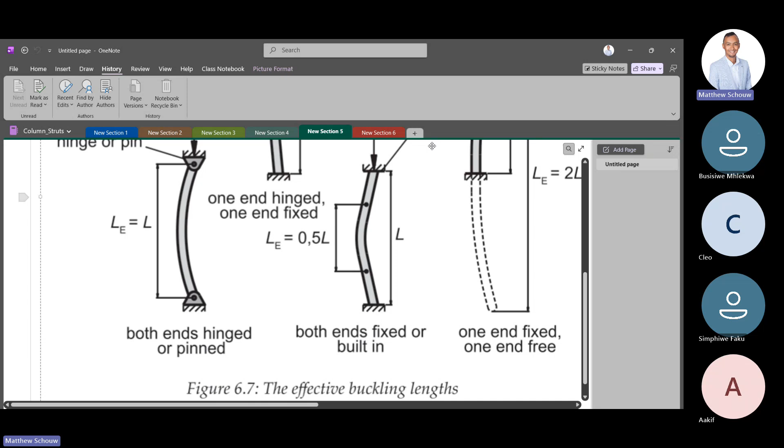All right, guys. Sorry, I heard that they use 40% of the class mark, I think, of what we've qualified, was to get into the exam. Is that correct? Yes, that's correct. Yeah, yes, that's correct. Let me just quickly - I mean, I don't want to.